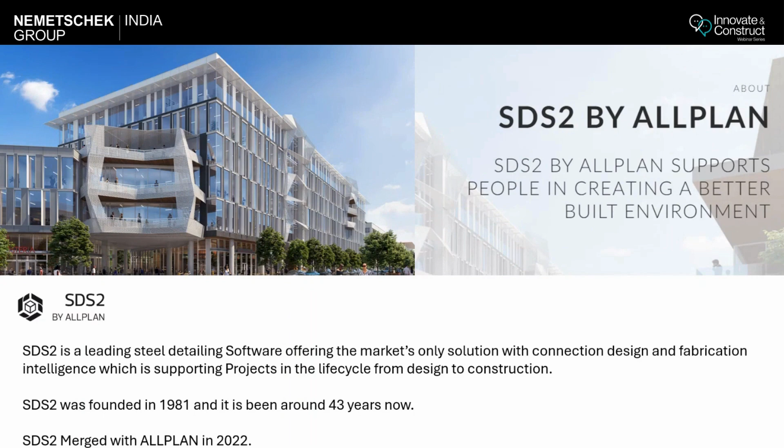So this is the basic workflow of SDS. So the first and foremost thing in SDS is the setup. So this is the most critical step where you put a lot of data into the system, where you define your auto standard connections, what your fabrication preferences are, what bolt type you want, what your requirement is, what environment you want, and what profile size and material size you want your model to be.

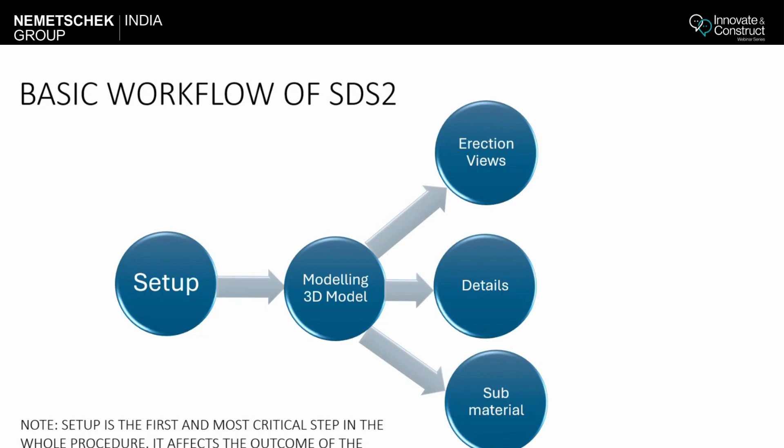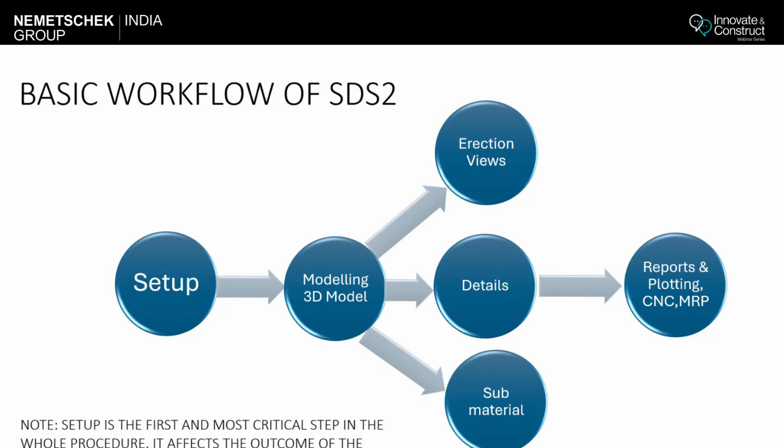So after that data, you basically make a 3D model out of it. Then you may take erection drawings, details, and submaterials out of the model. And then you do the MRP export. So we are currently focusing on the MRP export, that is your PowerFab export. So before that, we will see what steps we have to take into consideration while doing a setup, while modeling, while taking out the erection sheets, detail sheets, submaterials, and how we have to do our project setup. So let's start.

So before actually starting with the topic, I'll give you a brief summary of what MRP exports we were using. So earlier we used to use Fabtrol, then we used to send a KISS file. But the KISS file is not capable of carrying a lot of information. So that's why nowadays a lot of fabricators are asking for an XML file. Okay, so we have a lot of added advantages with an XML file.

So you can send GUIDs, globally unique IDs, which carry the data to integrate with any cloud collaboration platform like Trimble Connect and with PowerFab. Then there are many other improvements between the SDS and PowerFab side. So that has also been integrated into XML. Then XML can also carry a lot of data regarding drawing logs like revision dates, revision descriptions and all.

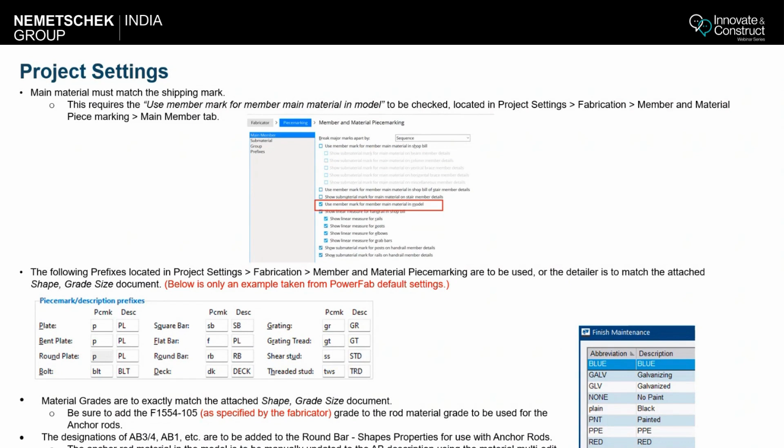What other things you have to consider is grating. In PowerFab, PowerFab always needs the bar thickness in the bill of material. Then, for example, if you're adding any anchor bolt, you have to add it into your project settings and then add it into your project, so it can be reflected in the bill of material.

Then if you see the project settings, in your bolt designation, always choose bolt material only. What this will do is, if you have any TC bolt like F1852, it will not come as F1852N. So you do not have to give a description, because PowerFab does not understand that. So always remember to have this setting on bolt material only.

Then there is one more setting under bolt detailing settings for breaking apart your bolt, nut and washer. Always remember, do not do that if you are sending a PowerFab export, because in that condition PowerFab will read duplicate quantities.

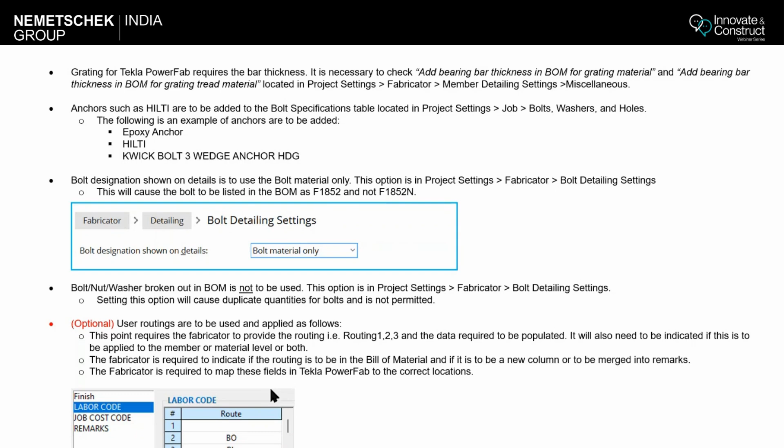Then the next thing, if your fabricator wants, you can use the routing setting, but you need the information from the fabricator, like where you want to populate the routing, whether in the bill of material, in remarks, or in a new column. So for all those kinds of settings, always ask your fabricator before proceeding. So these are the key areas you have to take care of in the project setup.

Now we'll go further to the CNC files. In CNC, always remember to check this part: include attached submaterial in member download. You have to check this for both your DSTV and DXF. Nowadays, PowerFab needs the submaterial or the gather data to be included in your CNC files. And one more thing, if you are sending any other files like Bentech, EMI, HGG or Lightning Rail, try to keep it as a separate export. Do not include it in your PFXS format.

The next SOP we are going to discuss is regarding modeling. The first thing, which I already discussed, is the SDS2 model is to contain all elements. Only 2D drawings or details are not permitted. You have to have a solid physical member in the model and then detail it. If it is a dummy member, add it as a dummy member and then add it into the bill of material.

Then if you are breaking any member apart, always consider that one member should have a main material. Then do not swap member ends for primary members. Then group members are not permitted in PowerFab export. Then you have to keep your finishes consistent and be very careful with the user piece mark.

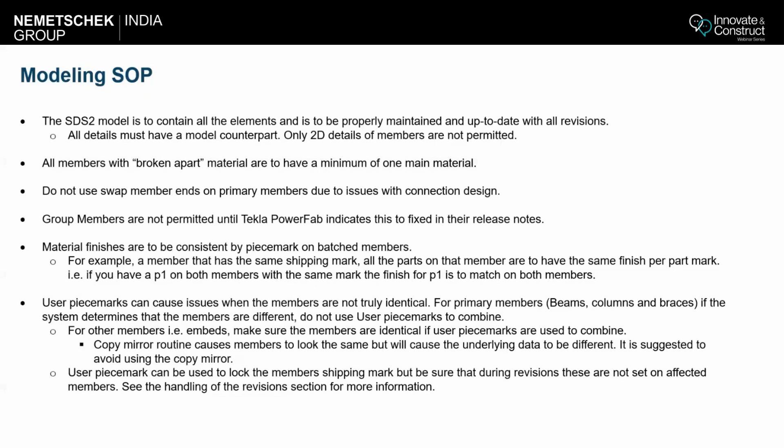So now moving forward, we will discuss the detailing SOPs. In the detailing SOPs, the first thing is you have to load one member on one sheet. Generally for PowerFab, we do not entertain multiple members on one sheet.

It's always better, if you want to make your life easy, to load one member on one sheet, for both gathers and shop drawings. The second thing is you have to keep your member mark and the sheet name the same. So for example, if I have a beam named 1B1, try to keep the sheet name also as 1B1.

Then in the erection part, for erection drawings, you can load multiple views on one sheet. There is no problem. But try to keep your primary views first. Then, editing in bill of material is not permitted. So if you are planning to do any editing in bill of material, please do not do it, except a few changes which you can do.

The first thing you can do is, if a stringer is there, with a lot of main members, left and right stringers, if there is a return, always try to keep the longest material on the top, as PowerFab will consider that as your main member. The second modification allowed is if the fabricator asks you to add a buyout member in a special condition, you can do that, but if you are changing any quantity, change it through unit quantity. Do not directly change the total quantity.

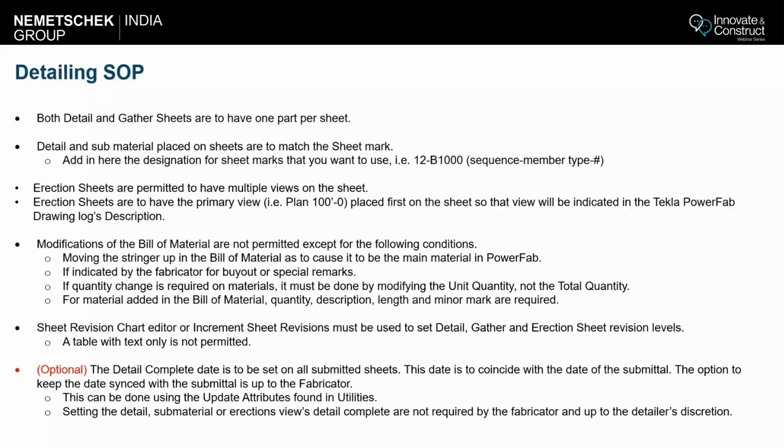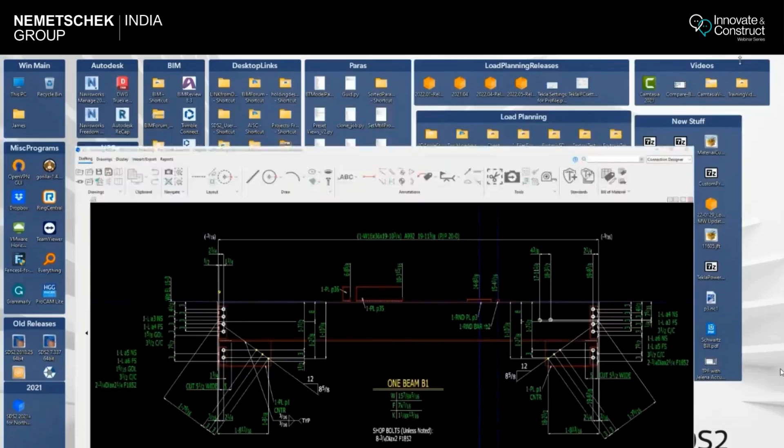SDS2 is different than Tekla Structures. With SDS2, we have a number of added benefits. When we export a file and it imports into PowerFab, that file contains both the member data and the bill of material data. So let's go ahead and open my XML file. This will give you a nice idea about what's going on. Inside of this, you can see we have our bill of material data, and we also have our member data.

When this is imported into PowerFab, it does a comparison between both of these, and it takes the bill of material as the final authority. So if there is any discrepancy in a part or a member, or it is modified in the bill of material, it is going to notify with a warning in the import log. The reason I bring this up is in SDS2, you can make modifications in your bill of material. What I strongly advise people to do is to do everything through the model.

But there are some times when you have to add something or make some modifications, like Hiltis, or saddle clips or something like that. But I always encourage you to follow the model discipline, and get everything through the model. So here, if you see, for a round plate, you always have to put a length here, so that you get everything correct in your PowerFab.

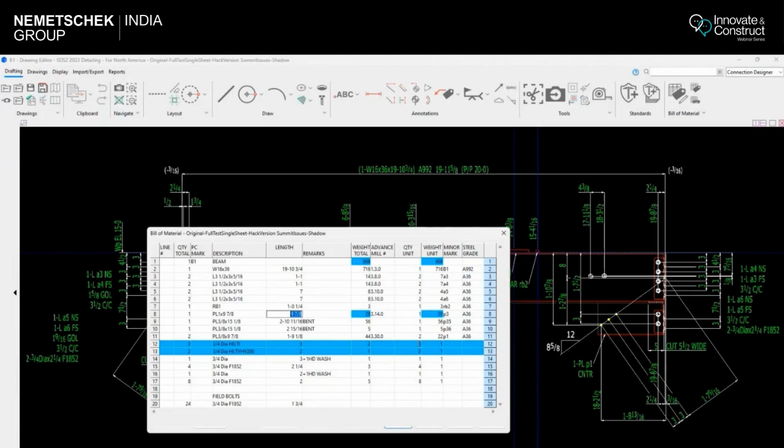The other thing I want to tell you is whenever you add any manual material, always change the unit quantity, and that is going to update your total quantity. Do not just update the total quantity and leave the unit quantity as it is. Then, let me open my stair.

So let me open my bill of material. Yeah, so now if you see here in stair, there are a lot of main members. There are more than one main member. So if you see here, all these are main members, returns and main stringer.

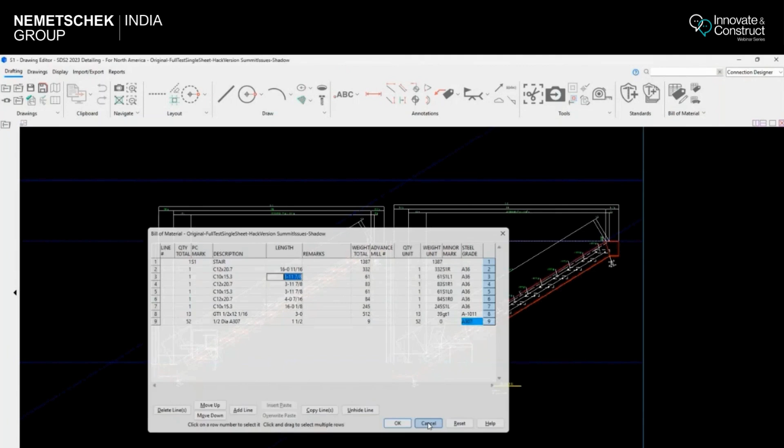So I always encourage, always try to move your longest material with the longest length up. When you do this, PowerFab will consider this as the main material line. Else, you will have your small return like 4 feet or 3 feet 11 as your member, and the fabricator is going to complain about it.

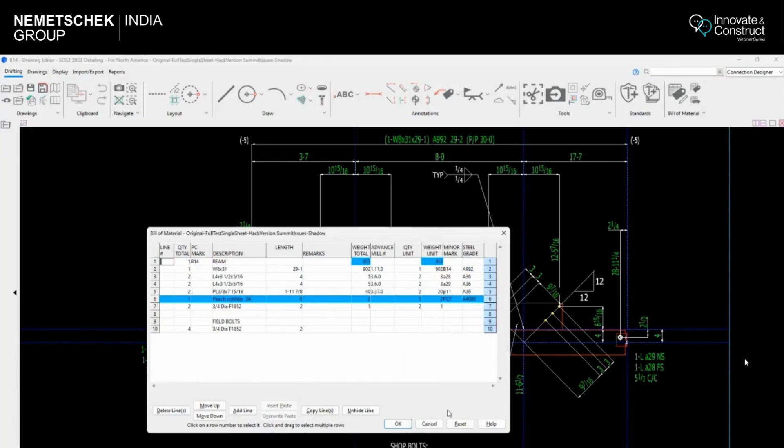Now I'll go and open my B14. So now if you see here, you can notice that I have added this bill of material piece, and it has a piece mark PCF and grade A 4000. In Tekla PowerFab, it really likes to have a piece mark and a grade. So if you see here, the PCF is the piece mark which I have added here, so we do not have any issues in your PowerFab export.

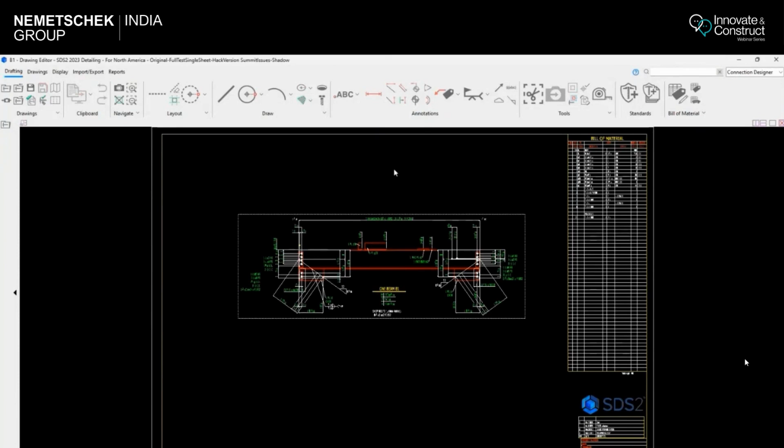So now let's go on to a sheet. In SDS2, unlike Tekla Structure, it has a detail sheet and a detail. We basically put a detail on a detail sheet. But for all the fabricators, there is nothing like a sheet or a detail. Everything for them is a sheet. So the best practice is to place one member on one sheet. I'm not saying that if you put multiple members on a sheet it will create an issue, but you might face problems in occasional cases. The best practice is to always have one sheet, one detail per sheet.

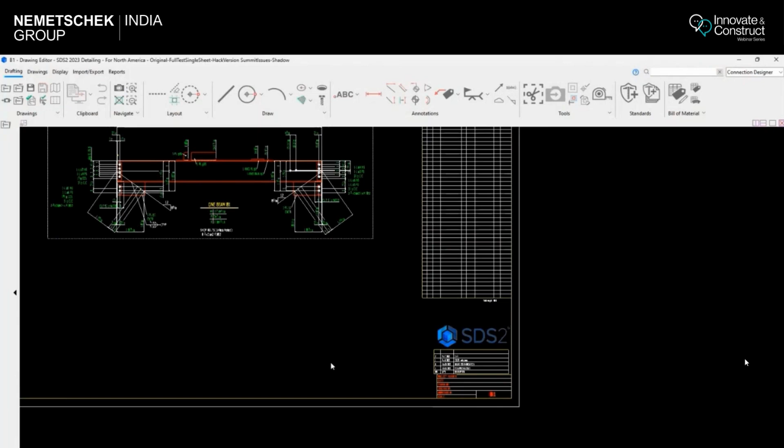The other thing I want to explain is, make this member mark on the sheet and the sheet name try to match these both things. For example, if it is 1000B, keep this as also 1000B. So if it matches, it makes your life easier, and it gets a proper PowerFab export.

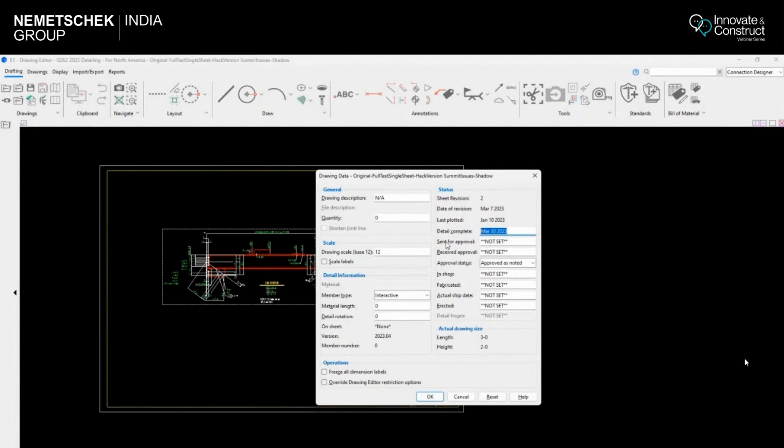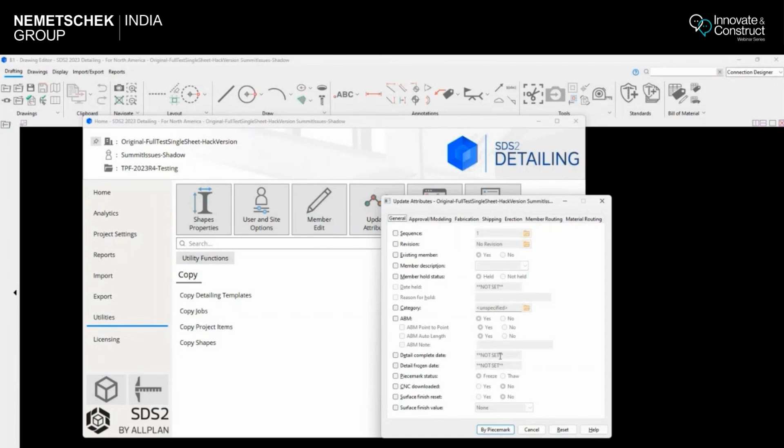The other thing I want to bring into notice is I have set my status, my detail complete date on the sheet, not on the detail. I have kept it on the sheet. This information can be used to populate a lot of information into PowerFab. Now a lot of detailers are complaining that setting the detail complete date by going into each sheet and updating it is tedious, so you do not have to do that. You can directly go into your utilities and go into update attributes, and here you can directly set your detail complete with one single go.

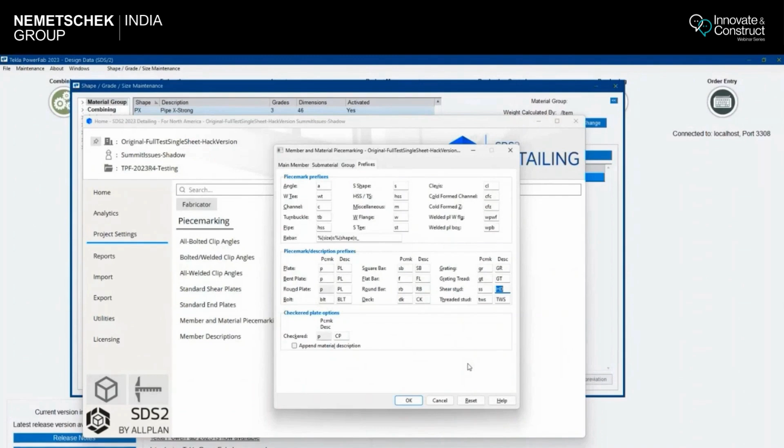So for that reason, I have to map this into my PowerFab. In my SDS, if it is HD, I have to tell PowerFab that HD in PowerFab means STD. So now you might be wondering, as a detailer, how can I get this?

Always ask your fabricator to go into reports and ask them to give you a list of your material group, shapes, grades, and sizes, and make a report and send it to you.

Because a lot of times, there is a problem that this thing was set up by someone and he left the organization and moved to another position. Or for example, they have set it up for Tekla Structures and not for SDS2. So whenever they say my Tekla Structures work fine, why is there a problem with SDS2 - the reason is you have done everything for Tekla and not for SDS2. So we have to fix it.

And the other issue you will face is with fabricators who are using the FabSuite. The main problem is they have been messing around with the main file for a long time, and that is creating the problem. So sometimes you have to untangle the mess.

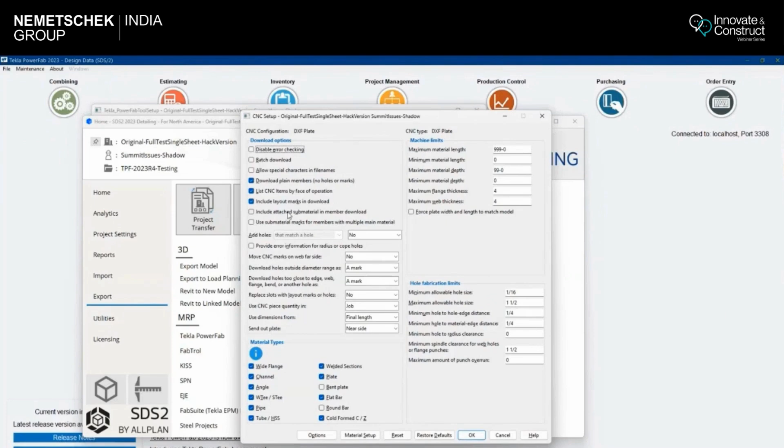Now let me tell you about the DXF plate also. Here also you have to just select this, same in this setup. You have to include the attached submaterial in the member download option. This will give you an idea of what all materials are going to be pushed into your CNC setup.

So now we'll go ahead, let me cancel this. There is one more thing which is important. Here, shipping mark used as main material. So are you setting your main material as the shipping mark?

In your project setting, if you go under piece marking and material piece marking, you will see this option: use member mark for member main material in model. Always tick this, and what it does is set your member mark for the main member in the model. If you set this, you do not have to choose the above option, use member mark for a member main material in shipping. It works for the same.

Always remember to have this option ticked whenever you're doing a CNC export for PowerFab, so you will not have to worry about it messing up in your PowerFab exporter.

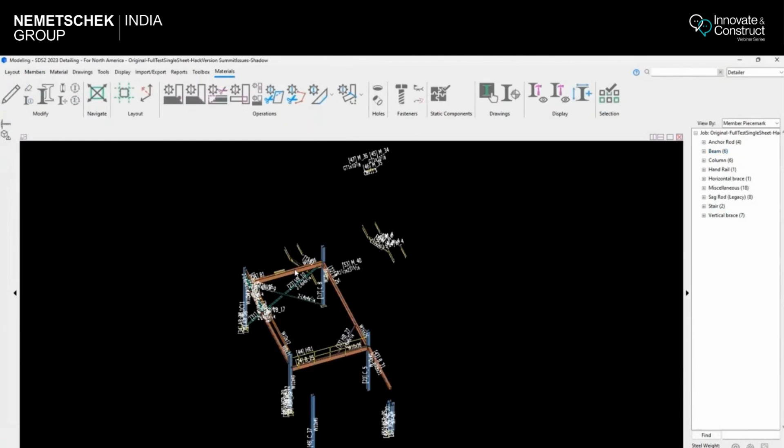So you have this option for member description. You can change your member description here, and whatever information you feed here will get populated into your PowerFab.

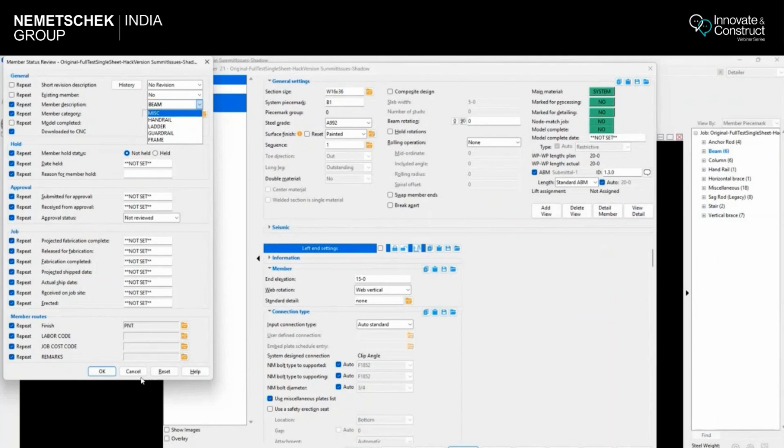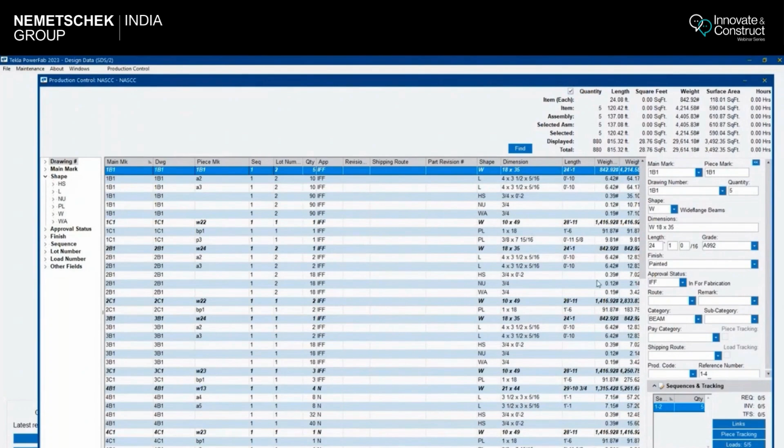Going back, if you feed this information here, let me go into production control, let me open PowerFab. Here, if you see the category field, this field is going to populate through your member description. So it's always better to put this kind of information.

Then you have more options, if you go down, all these options are also there. In fabrication, you can choose if your fabrication wants a station code, station name, or any barcode IDs. You can select these codes.

These codes will be included into your package. So we have almost done the setup files. We know what we have to take care of in the modeling and detailing, and we have also exported a file.

Now I just want to update you about how our actions will impact the PowerFab file. In PowerFab, they read the member with GUIDs. So what are GUIDs? These are globally unique identifiers, also known as UUID, universally unique identifiers.

These are basically 128-bit values that represent an object. So every member has a different GUID. For example, if you have two beams in SDS, maybe the piece mark is the same, for example B2, but in PowerFab the GUIDs will be different for both beams. So it's kind of like your Aadhaar card: even if you're twins, you will have your own different Aadhaar card numbers.

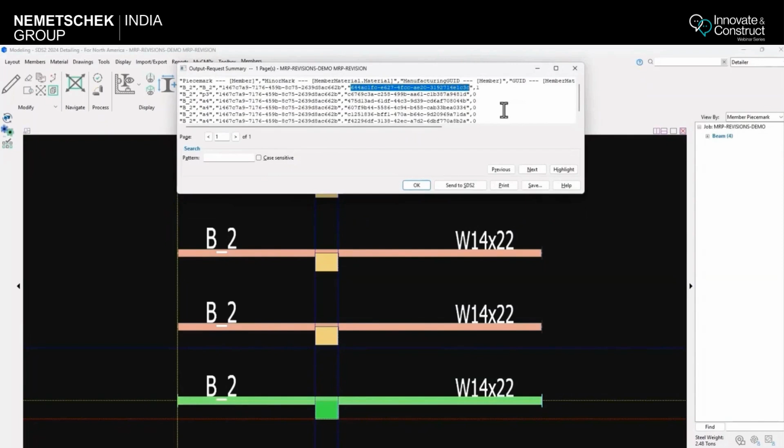So these are all GUIDs. Let me push it up. All these are manufacturing GUIDs. They never change; if you do any editing, they will never change for a member. They have two parts: the first part is the main member or assembly GUID, and the second part is the main material GUID. Again, I'm focusing that the member GUID will not change.

Now let's import this into PowerFab. I'll select all the beams and export them; I have a pre-saved setting. We'll go into files and import the PFXS file. Import, save. Now this is a mapping file which determines how you want to map certain data. Moving forward, we'll just map the data.

Now you can see 4 B2s are imported. I'll continue, and the import is successful. Now if I run my MRP report, you can see B2 is in 4 quantities. Now I'll make some changes here. I'll change this beam to a different profile size. Let's beef it up to a W14x34.

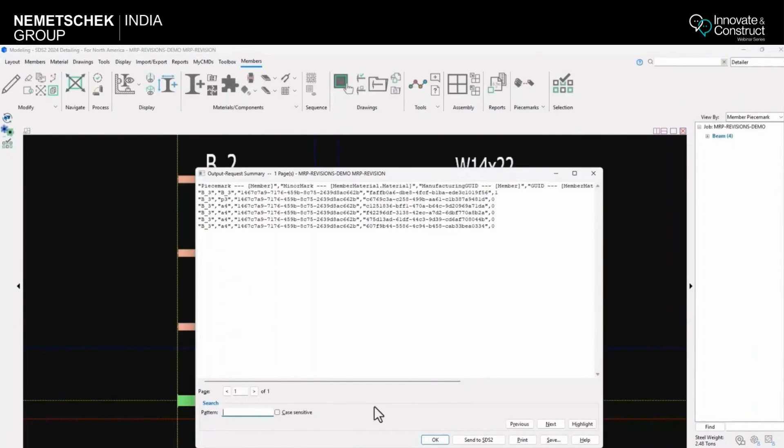Now you can see there are three beams with B2 and one separate beam with B3. Let's open the report, and bring the older report for reference. Now you can see the assembly GUID is still the same, but the main material GUID changed because we changed the profile size.

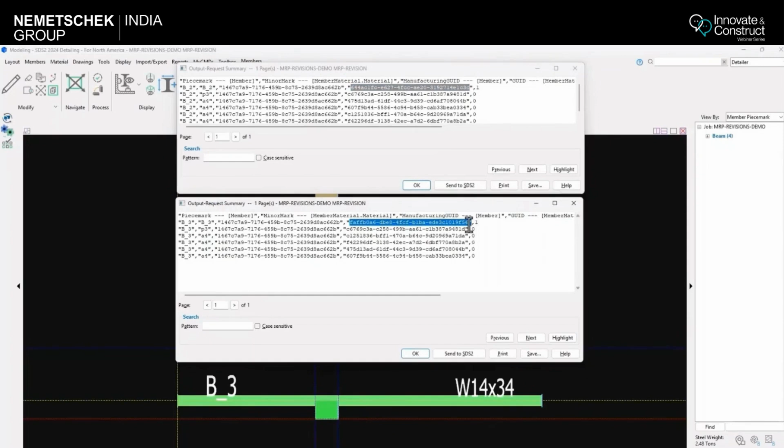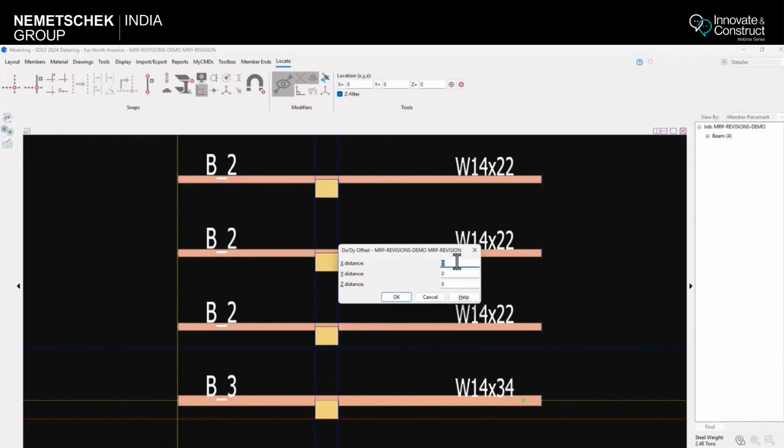Now what we will do is change the length of this beam. We'll increase it by a foot, and run the report again. Now let's arrange all 3 reports. I'll bring the previous reports and arrange them.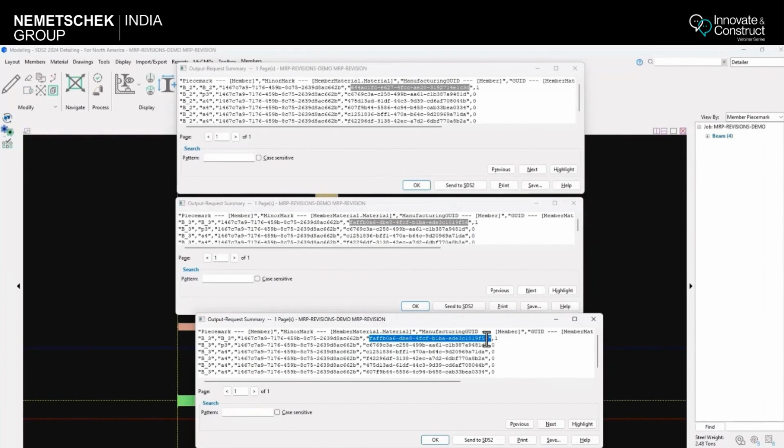If you see, the assembly GUID is still the same for all 3 beams, and here the manufacturing GUID is also the same. Why? Because we only increased the length; we did not make any major changes. That's why the manufacturing GUID is the same for the last change. Now, did only B3 change? Is there any change in B2? Yes, the quantity of B2 has changed.

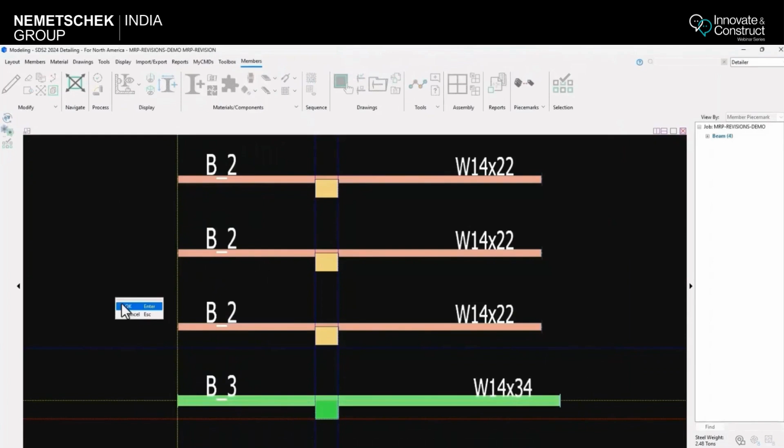But a lot of users export only the changed material, which is also one reason for issues in your PowerFab export. For example, there are 300 B2s and only 6 are changed. If you only send the revised members, PowerFab will overwrite the data and only consider the 6 beams. So I'll showcase this: we'll export this one beam and see what happens. Now I'll import the data in PFXS format. Let's import.

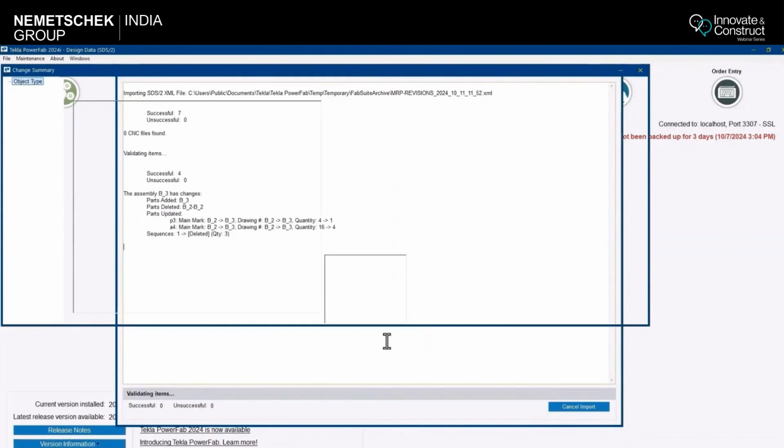I'll just save and replace the same mapping file and I'll press OK. So data is imported. Now you can see it is written as update. So it is updating the B3. So let's go to continue and let's see what is happening here.

Okay. So here you can see it's written as B2 is deleted. Okay. So now this is a warning sign. So let's open the report and let's see what exactly is going on. So now you can see only B3 is there. There is no B2 and B3 is in one quantity.

So now this is the kind of problem you will face if you only send the changed material and you will not send the complete big file. So now we'll do one thing. We'll send the complete file and we'll see what is the change we see. So I'll just again export these 4 all beams. I'll just import it again.

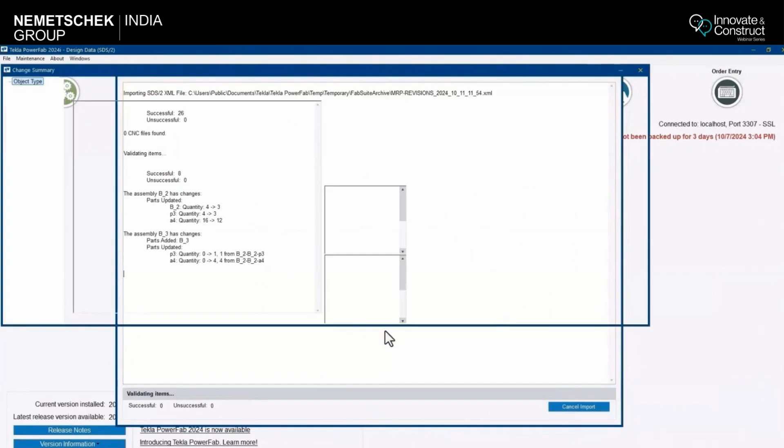And I'll save. I'll again map the file. So data is imported. Now you can see the B2 and B3 both are updated. So if you see B2 quantity is updated and B3 also quantity, and it's basically newly added. Now we'll just continue. Okay. And we'll see what is the background scene.

Now you can see B2 is in 3 quantity and B3 is in 1 quantity. So I always recommend whenever you're sending a package, send a complete package, not just the selected members. Okay. So now this is the impact we have when we only send the revised sheets. So if you are very sure that what you're sending is okay, then only send it. Or, it's better to send the complete package.

Why? Because as I already told, when you send the first package, the GUIDs will never change. So PowerFab will already have a record of those members. Now, if you send a new file, for example, let's say GUIDs is XYZ for the three beams, and you change one beam, and you are only sending the one beam. So when it reads XYZ, it will consider that the three beams are now deleted and only one beam is there. So always send a big package, complete package, instead of sending the selected sheets.

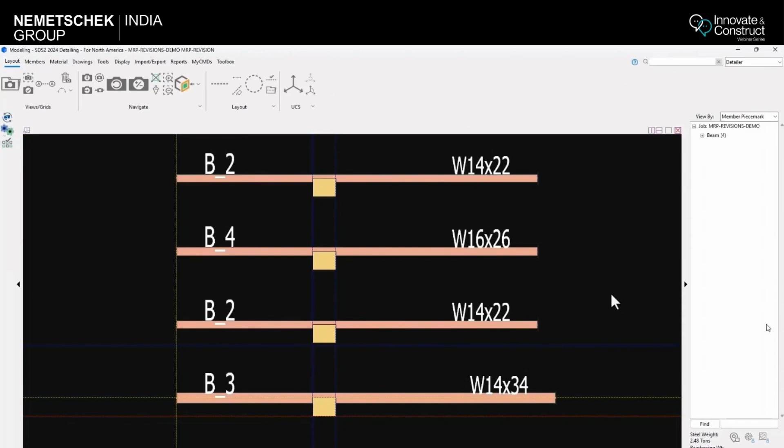Now here is one thing: all the statuses of these beams are already in PowerFab. So they already have the data and GUIDs of this, and in PowerFab they are already in the shop. So now when we export it, let's follow the routine. So we just import, just see what is going on here. So let's import. You save this and map my files.

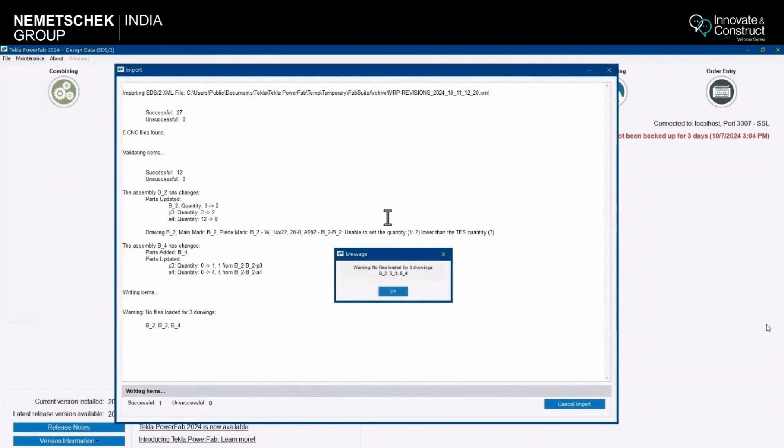So now you can see the B2 is updated, but you can see it's saved for later because already in PowerFab there is a status that it is in the shop. Okay, and the B4 is the new member, the new quantity. So you have the option to take action on this. So now B3, nothing is there because it is not changed. So now we'll continue to import.

Here you can see the quantity is updated from 3 to 2 in the report. Yeah, but there is a problem: you can see that it is telling that it is unable to set the quantity from 1 to 2 because it is already in the shop and it is already in the process. And B4 there is no problem, so the quantity is updated from 0 to 1. Okay, and regarding B3, as I already told, there is no issue because B3 has no changes.

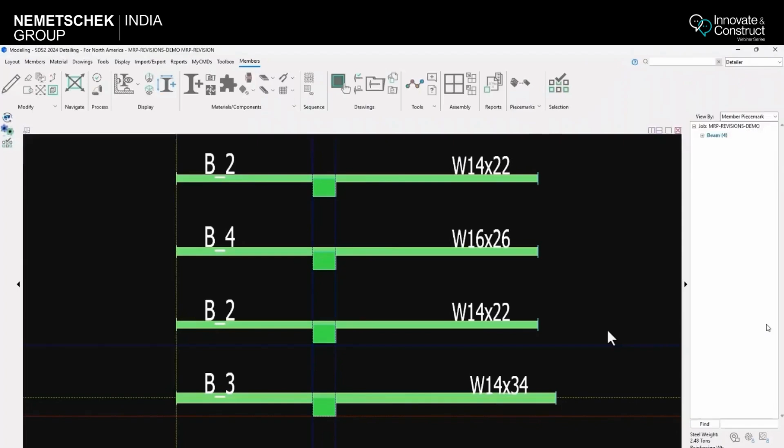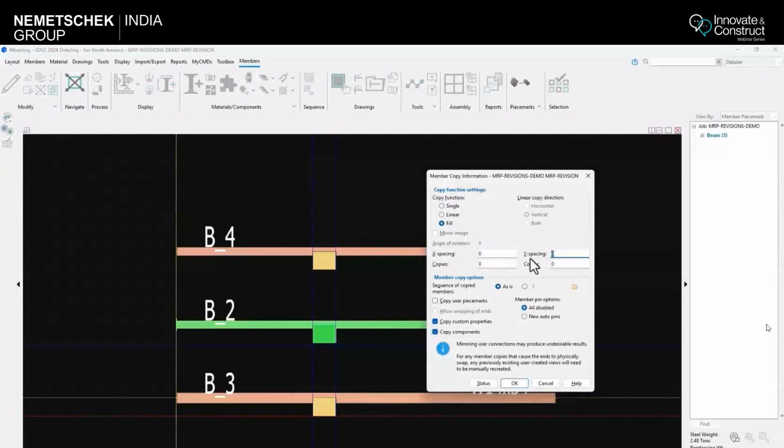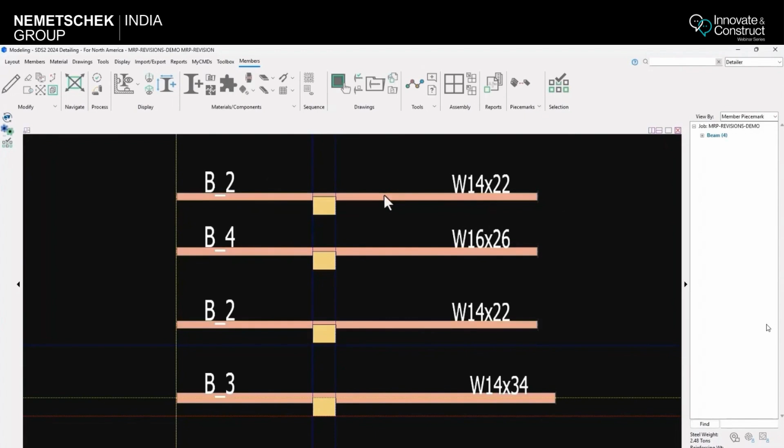So now we'll again go to SDS, and now we are going to the next step. So what I'm going to do is I'm going to delete the B2, and I'm going to copy and add a new member. Yeah. So now what the change happened is, SDS has an auto piece marking system. It's a wonderful system and it's a very solid system where SDS assigns a system piece mark. So in this condition, when the piece mark is assigned, now it is assigned with the new GUIDs. So now we'll just change the profile size.

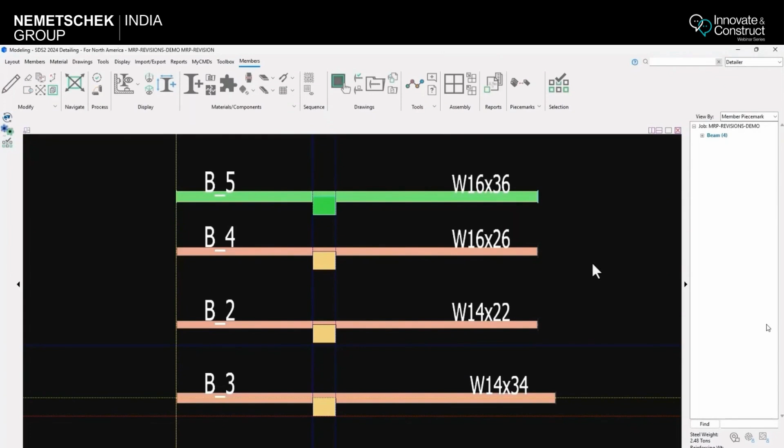So whenever you have a revision or you have to change a profile size, always prefer not to just double click and change the member. Rather, add a new member, delete the old one, and then export to PowerFab. So now in this condition, B2 is the only old beam. B3 there is no issue. B4 is the new one. B5 is the new beam which is added. So now we'll export and we'll see what happens here.

Right. I'll save the file. Done. Map. And now, if you see, B5 is the new one. B4 we have already set the criteria, so there is no change. B2, if you see, it's written save for later. So, let's continue. And now you can see that you cannot lower the quantity; it is telling that because it's already in the field, but the new beam is added. So now we'll see the production control status.

So now here, if you see, B2 I still have in two quantities. B3 is the new one. B4 is there and B5 is there. And it's a brand new member. But B2 still, if you see, I have my two quantities. So what you can do is you can leave it as it is. Some companies will want to deal with this at a later stage. But at least in that inventory, they have the new beam.

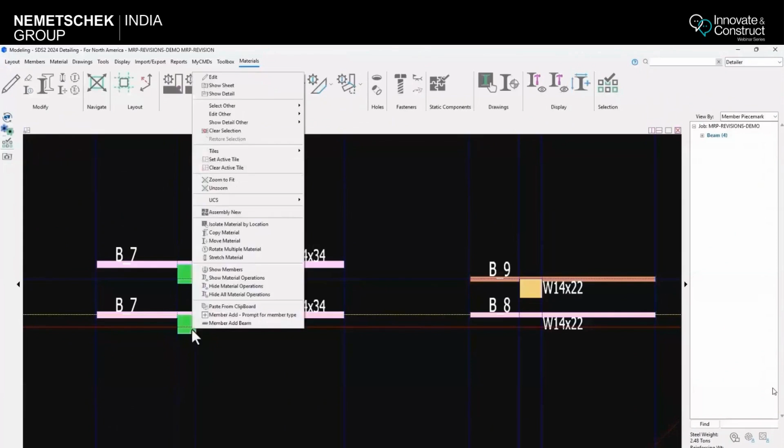Okay. But now the problem is generally with the piece mark. So if we take a look at these P2s, you can see this material is galvanized and auto is checked. But if we go to the other member, in surface finish, the auto is not checked.

Now, these kinds of issues generally do not happen with sub-assemblies, but they happen when you're copying a member. Suppose both members' materials have the same finish, it will not be a problem. But in this condition, since the beams have the same piece mark, and even the submaterials have the same piece mark, when we import it into PowerFab, we will face the issue.

So now we'll see how this happens. You can see here the auto is not checked. Now when I copy this material to any main member which has a different surface finish, since the auto is not checked, it does not have the intelligence and it will copy the same properties. Okay. Now you can see since the check is not there, it is not updated.

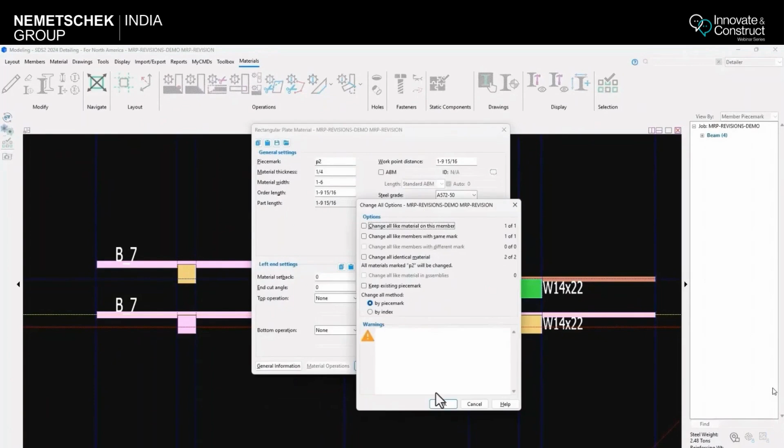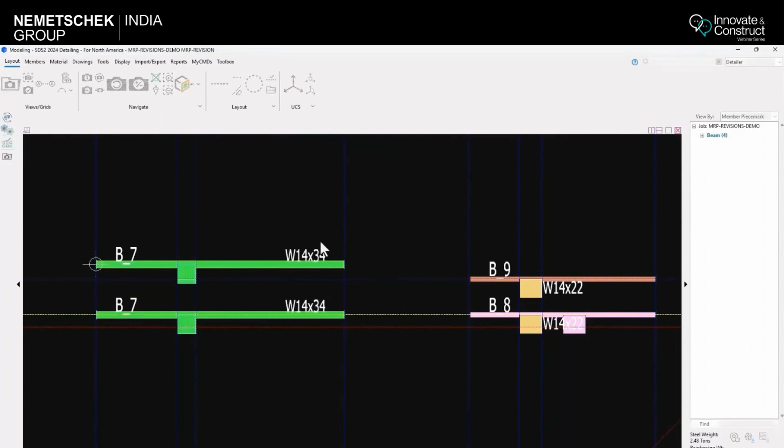Now if I go and check the auto command and I try to copy this, you will see since the auto is checked, it will automatically pick the surface finish of the main member. Now, if we edit these members, SDS has a very smart, intelligent feature.

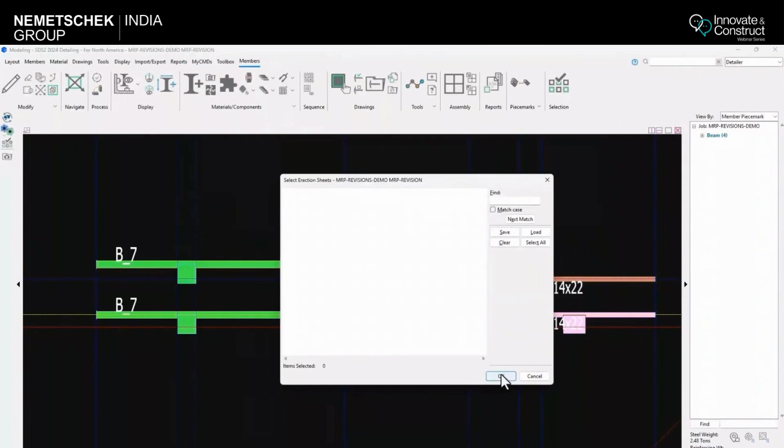You can see there's already an indication shown that the material has a user finish. But a lot of people just ignore these notifications and just send the steel to the fabricator. So now let's send this to PowerFab and see exactly what issues we will face in PowerFab. So let's save this.

Let's import the file. Okay. Let me create a new name for this project. Let's save this, map the files, and let's import this. Continue.

Yeah. So now if you see here, it says duplicate main mark accessory not matching. So the P2 material has two finishes, because different finishes are applied to the same piece mark. That's why you will find this kind of error when you import the file into PowerFab. Now if we check our import log, you can see only one member is imported.

Okay, so in this condition, what PowerFab does is it picks whichever member with a different finish comes first and imports it. The other member, it simply ignores.

It's a small example, but if you have a large quantity of beams with this issue, there might be a chance that the member will not get fabricated in the shop and will not go to the site, and you will face last-moment consequences. So always be very particular when you're putting the finishes.

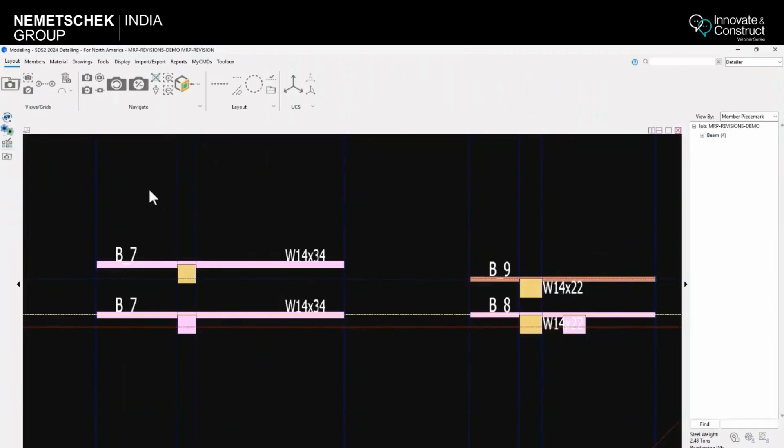So let's see what impact we face if we have a user piece mark. We'll go ahead and open our piece mark model. If you see here, I have created an exaggerated example of two members with different profile sizes. For the plate, I basically mirrored it.

When I did it, you can see I have given both members an identical user piece mark. And when I rotated, you can notice the reference point shifted from near side to far side. One more thing, you can see the hole has also disappeared. So I always say be careful with the mirror option. I prefer not to use it, rather use copy and rotate.

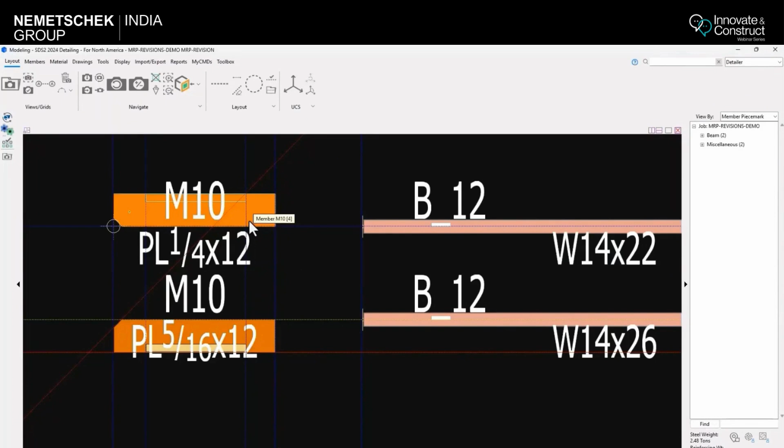Another thing I want to point out is with two members, the system always details the lower piece mark or the member first in the batch. Similarly, in the beam, I have used different profile sizes, but I kept the same piece marks.

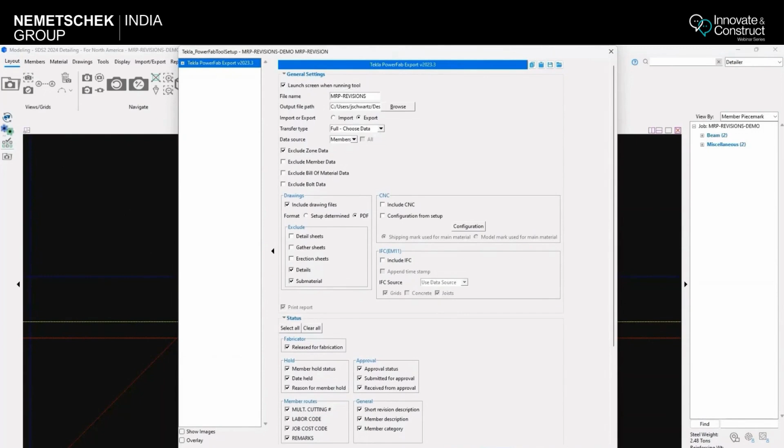So let's grab this and export it to PowerFab. I always prefer not to do a user piece mark, because SDS has an auto piece marking system, so if it is giving you a system piece mark, there might be some changes in the member. So let's import the file which we have exported. We'll just keep a different piece mark number so we can detect what is different. Now we'll just import it.

Let's continue. Now you can notice here it is telling that the main mark is duplicate, and also you can see the warning message. So we'll just go to production control and look at what is going on here. You can notice it has imported only one piece of both the member files. Basically it has detected the members are duplicate, and it has only imported the first piece mark, the lower piece mark. So that's why I always suggest, whenever you're exporting anything to PowerFab, don't do a user piece mark. Whatever piece mark the system has given, keep it as it is.

Okay, so the next thing we are going to discuss: till this time we have exported the file from SDS2. Now we will see the settings which the fabricator has to keep in his PowerFab to properly import the SDS file. The first thing you have to do is the import process. You go into select file, import, select the PFXS or XML file, and then you just import it. The next thing, you can add in the job and job description if different from the automatically appeared one.

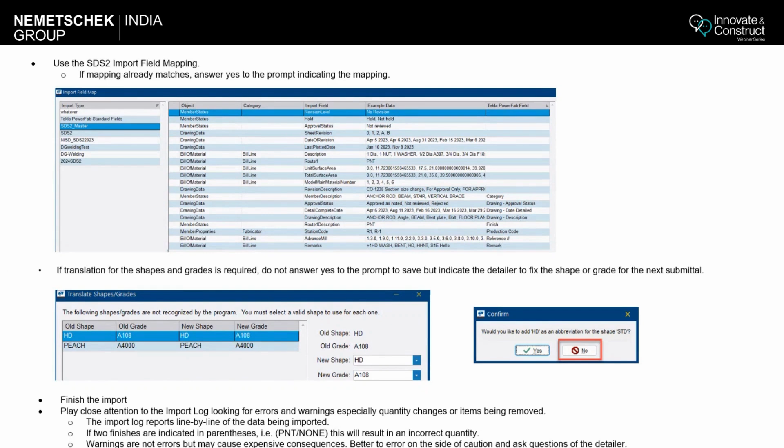Okay. So just press no. If you see here, HD is basically a stud. Would you like to add HD as an abbreviation of STD? If you think it's correct, then it's okay. If it is not, always press no. And then you have to map it.

Then the next thing we have here is, in your maintenance integration setting, SDS2, drawing type tab, remove this submaterial. As I already told you, when we were exporting the CNC file and the main package, we have only included detail sheets, erection sheets, and gather sheets. So there is no submaterial. If you have this on, it will give you a prompt that there is no submaterial available. So do not do this, because for the fabricator there is only a sheet, there is nothing like a detail or submaterial.

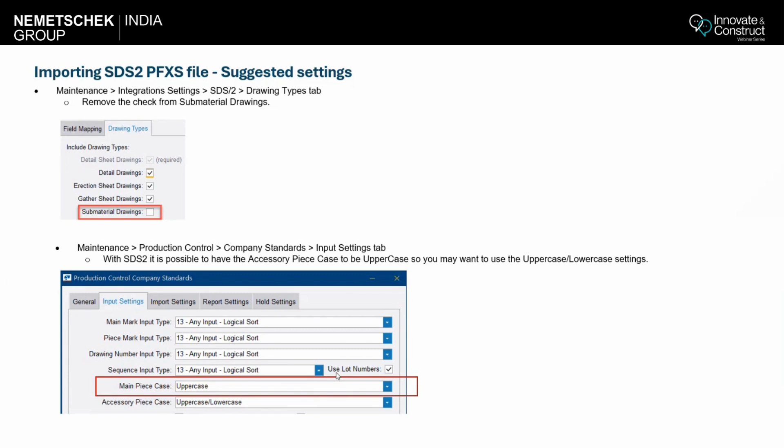Okay, then the next setting is under your maintenance production control, company standard and input setting tabs. There is only uppercase. I always recommend changing it to uppercase and lowercase settings. Sorry. What will happen is, even if you have an uppercase or a lowercase piece mark, it will understand.

Another setting I want you to keep is under your project management. Ask your fabricator to go to global drawing log maintenance, and what he has to do is basically map the names.

For example, if you see the assembly on main mark, in PowerFab or in Tekla, the assembly is your drawing. So you have to go to new and add it as detail sheet, detail sheets, or sheet. If it reads anything related to detail or detail sheet or details, it will directly map it into assembly. Similarly, GA is your general arrangement drawing, which Tekla understands.

So you have to add other abbreviations like general arrangement, erection sheets, GA, or erection sheet. If it finds any name with this, it will directly tag it with GA. Same with the part sheet - in Tekla they understand it as part sheet, but we have gather sheets or gather. So if you keep this, if it reads anything like gather sheets or gather, it will directly map it into your part drawing.

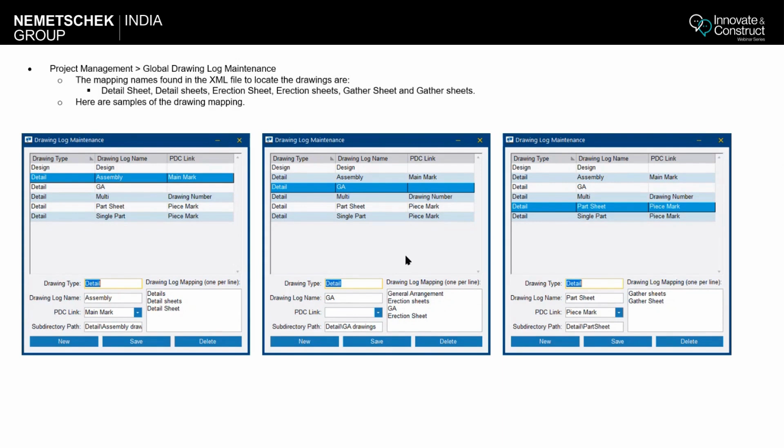So let's go and understand what we have to do. This is the last bit I want to make you understand. You can send this to your fabricator also - he just has to do the setting, and you have a seamless export into your PowerFab.

The other thing I want to tell you is how to import an SDS file into PowerFab. So let's import the file into PowerFab. Let me give a file name, whatever, and I'll just save this to project manager. So this I want to show you.

In this, if you see, it is telling that this is the mapping field - it is telling me how you want to import the files. So you just say no, and when this screen opens, this is the biggest problem the fabricator faces. Fabricators have Tekla PowerFab field, but they do not have it for SDS.

So a lot of things are matching, like section size, shapes - a lot of data is there which PowerFab knows where to map, but there is a lot of data like station codes which PowerFab does not know where to put. So for that, we have to create a mapping file.

So if you see here, this is a SDS2 mapping file which is created. If you can see, the member description data is supposed to go into categories, then station code is supposed to go to the related field. So if you want to create a mapping file, you just go to select new, type the name - SDS2, I'm just writing hello - and hit add. Now you can see all the fields which are in PowerFab are copied here, and then you have to start mapping these fields.